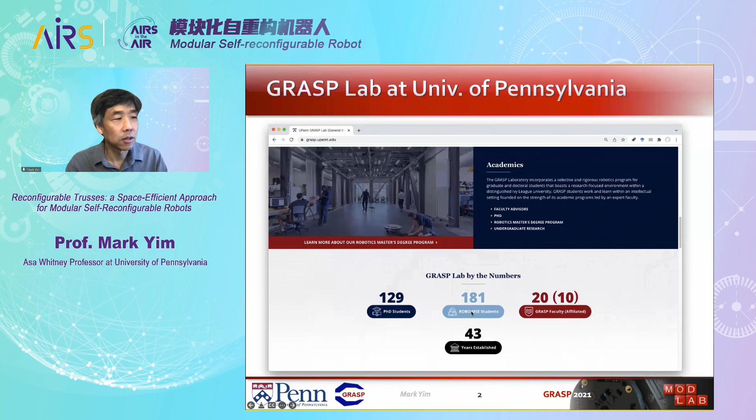Thank you, Dr. Lam. So yes, I'm going to talk about reconfigurable trusses, which are a space-efficient approach for modular self-reconfigurable robots. But first, I'd like to talk a little bit about the GRASP Lab. Since I'm the director of the GRASP Lab, I need to just give a little bit of the background of where I'm coming from. The GRASP Lab, as Dr. Lam mentioned, is the oldest. We have around 130 PhD students and 180 master's students, about 20 faculty in a large variety of areas, including perception and machine learning and control, planning and mechanisms. So that's me at the bottom. We've been around for 43 years, which is the oldest in the country. And I think that makes it the oldest in the world. I'm not positive, but that's currently where we are sitting.

So today, what I'd like to do is talk briefly about modular self-reconfigurable robots that I've been doing in my lab over the past quarter century or so. And then I'll talk about this variable topology truss, which is the newer system that we're starting to look at that's more space efficient. First about the hardware and then the software. So what is a modular reconfigurable robot? Essentially, it's modules that are very simple and repeated. You have lots of them. You can combine them together to form larger shapes. They can reconfigure themselves into different shapes to do different things. So historically, Toshio Fukuda did this thing called the cellular robot or CEBOT in 1989. That was his first publication.

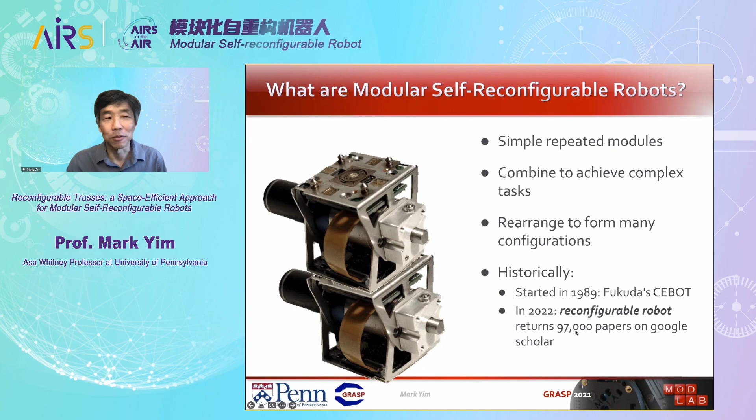Now, if you go to Google Scholar and you search for reconfigurable robot, there are 97,000 papers that show up. So there's a lot. Self-reconfigurable robots is still in the thousands. So there are a lot of papers since then. There's a lot of people that have been looking at that. What can you do with them? This is a video from 20 years ago. Just showing, for example, you can have a robot that rolls like a loop that's fairly efficient, or can move like a snake that's better at moving through terrain, or go through small cluttered environments and that type of thing. The robot theoretically could also reconfigure itself, maybe into a legged configuration. Legged robots tend to be better at stepping over uncertain terrain and that type of thing.

So over the years, there are a lot of different types of robots. There's even a book now on self-reconfigurable robots that is like a survey of the different robot types that have been created, modular self-reconfigurable robots. And in general, there are two main ones, I think.

There's one that we call the chain type, which is the one that you just saw the video of, in which the modules form serial chains that are like arms or legs. And then there's the lattice type, which are modules which are often cubes, but don't have to be cubes. They're usually space-filling geometric forms that attach together. And then there's the hybrids, which can do both lattice and chain type.

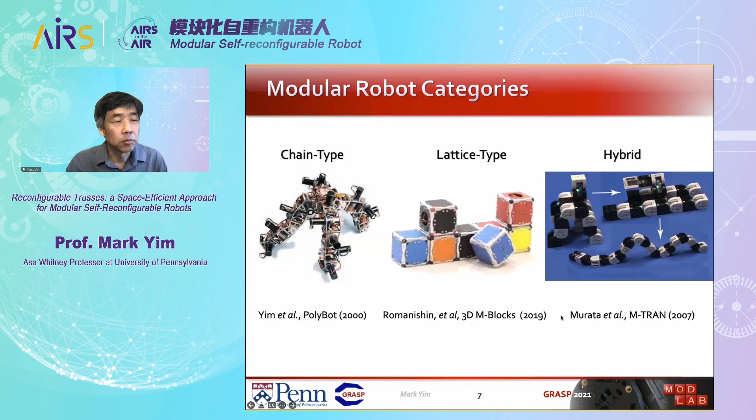So in the year 2000, I wrote a paper in the ICRA conference, in which I said there are three promises of modular self-reconfigurable robots. They can be versatile, because self-reconfigurable robots can change their shape to suit the tasks and changing environments. They can be robust, because if there are some modules that are damaged, they can reconfigure themselves, or they can throw away bad modules if you have redundancy, or they can self-repair theoretically.

And they can be low cost. If you have lots of repeated modules, you can use economies of scale to reduce the cost of individual modules. Of course, these were promises, and I didn't know if they were true. This was 20 years ago. Essentially, versatility has borne out. Yes, we can do lots and lots of different things. The robustness one, I'm not so sure. Maybe we've got some examples. People are starting to make some progress towards robustness.

The low cost one, I think, is pretty much not true. And certainly in some aspects, it's not true. And that's what I'm going to be talking about. And eventually it may become true, but I'm not sure. Okay, so let's talk about versatility.

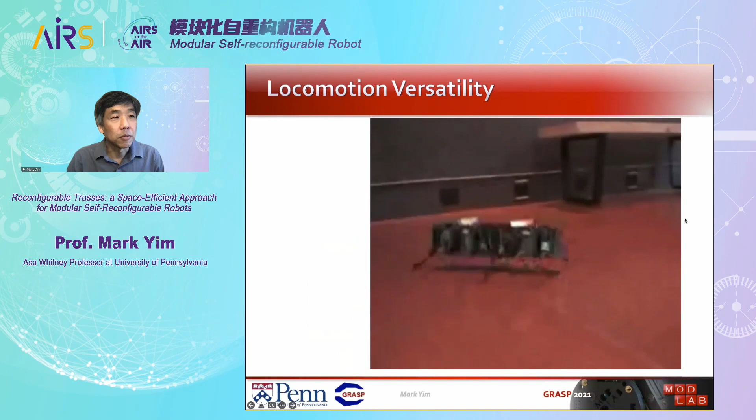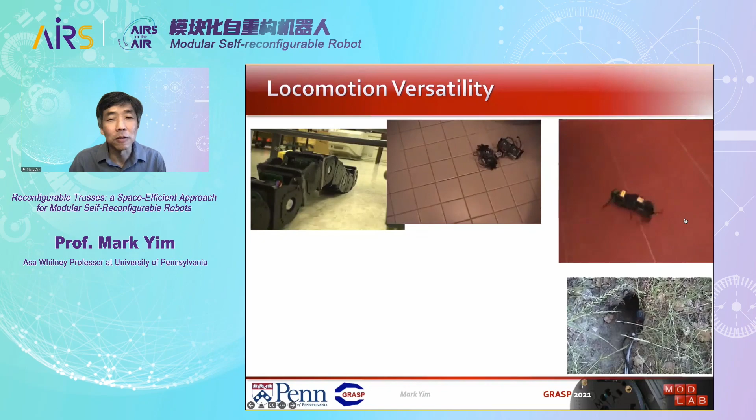In terms of versatility, there are lots of different styles of locomotion that modular robots can do, different types of walking or rolling or moving like a snake. This is actually a video of a snake we made and put inside a little gopher hole in the ground, with a camera in the head, and explored the different types of things you can see. We actually used the concertina snake-like gait, which is an open loop gait that conforms to the shape of the tunnel, and that worked pretty well.

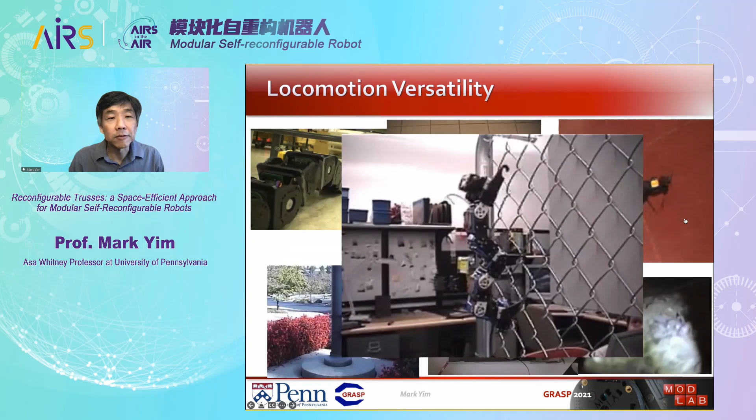These robots can also climb poles, climb fences, climb stairs. There's lots of different types of mobility, and they can even use human vehicles like a bicycle or a tricycle and that type of thing. This last video is actually of I think the largest number of modules we had in a single configuration, which is about 55, 56 modules in a 14-legged centipede-like gait. So there are lots of different types of things you can do.

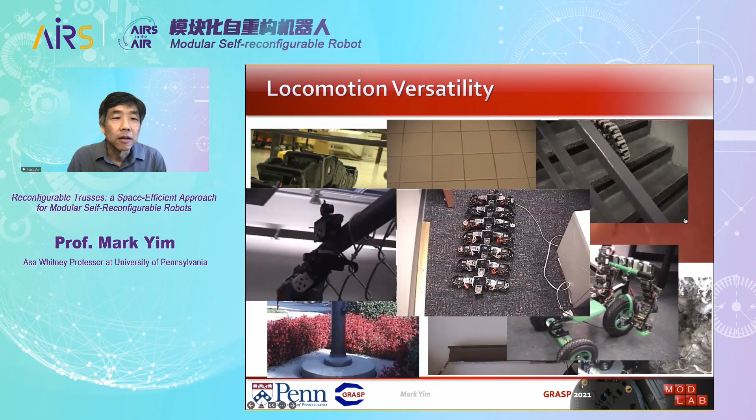I think we've shown there are maybe hundreds of different gaits that people have shown. People have also done manipulation, lots of different types of manipulation. Essentially, I think the versatility has been shown. Robustness is another issue. When you have lots of modules, you have lots more modules that can break, and so things are often failing.

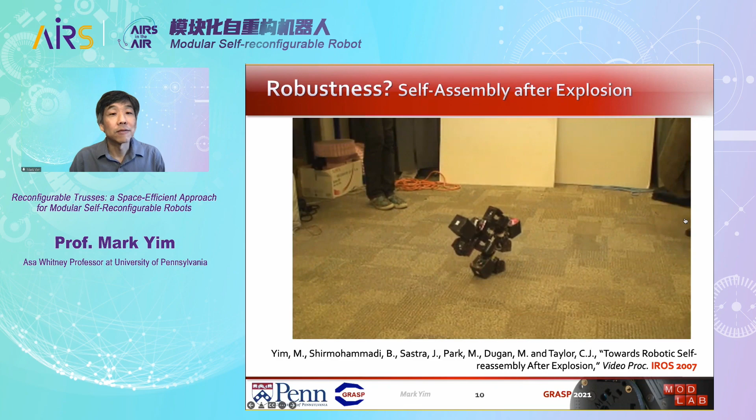But here's a simple example from 15 years ago of a kind of self-reassembly or self-repair. So the robot's walking by itself, and then some mean grad student comes up and kicks it into pieces. It can reassemble itself.

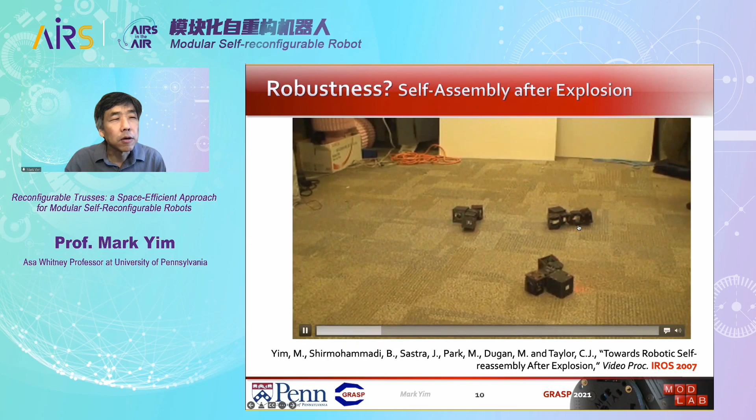So in this particular case, we've got groups of modules. I think there are 3 or 4 modules with a smart camera on board. The little blinking light is actually what the camera uses to communicate. Each little group can communicate with the others through the blinking light, and they can see that blinking light.

They also have an accelerometer, so they can tell whether they're upside down or upside up. They have a self-righting behavior. And the first thing it does is go through a search pattern to find the other pieces. It recognizes that it's fallen apart, and so it tries to reassemble itself. And they can move kind of like worms essentially around and try to reconnect. Each one of these groups has magnets on the side, so they can dock to each other with the magnets.

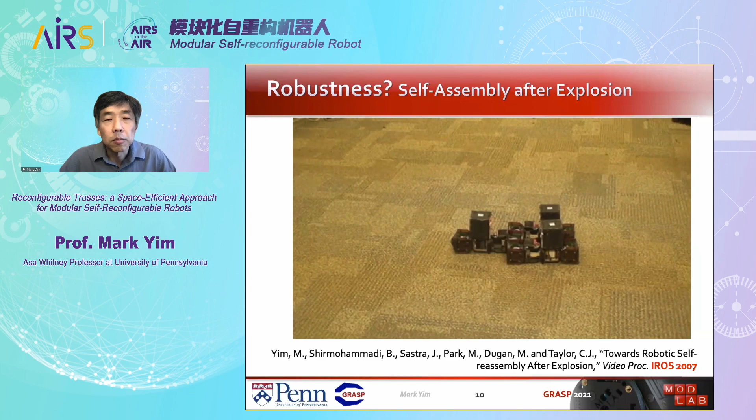I'm going to just speed up a little bit here, get toward the end. So the system can ultimately dock together, and then the idea is that if it ever falls apart, or if someone takes it apart, it can reassemble itself and then continue on the task that it was working on. In this particular case, the robot was walking, and in this video that we took, something kind of funny happened at the end as it was standing up again.

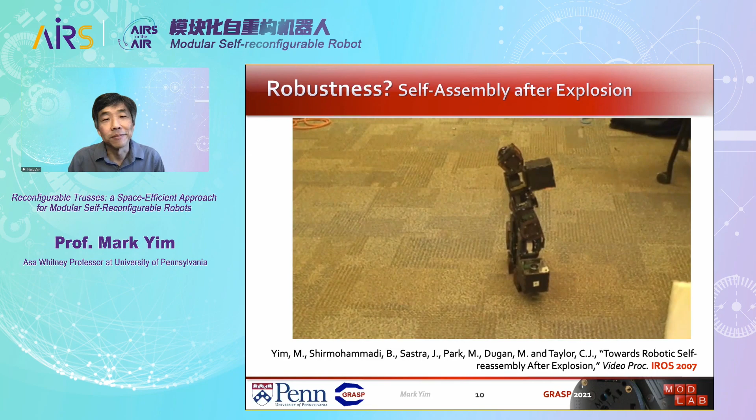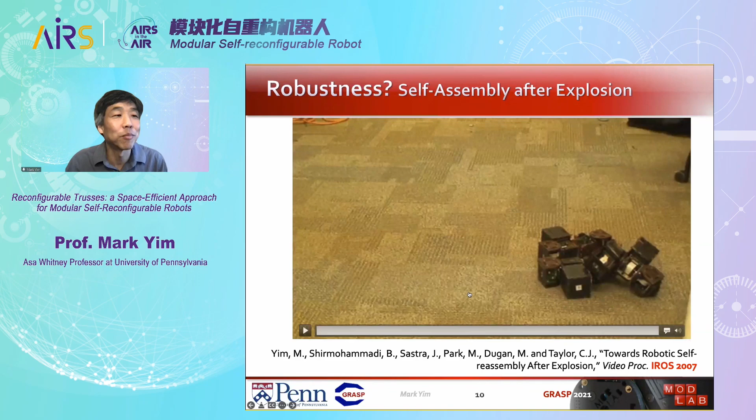I think one of the legs or one of the feet got caught in the carpet, and as it tried to take its first step, it fell down and fell apart, which was unfortunate. But it's also, I think, an example: people kept thinking, oh gosh, robots are going to take over the world because they can repair themselves and you can never destroy them, but we can barely make them walk. So I don't think it's really a concern. Okay, so that was 15 years ago.

Something that's a little bit more recent is a system that we call SMORES-EP. Whereas the previous system had individual modules that had 1 degree of freedom, these modules have 4 degrees of freedom. They have these connection plates. There are 4 of them, 3 round ones and 1 square one. The 3 round ones can rotate. Every face can be connected to every other face, so any module can connect to any other face. Each one of these faces can be connected at 90-degree rotations.

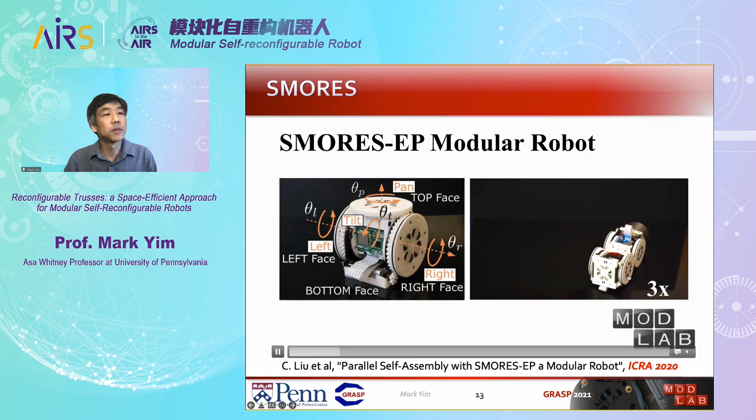So any 2 modules can attach in 17 different distinct kinematic ways at 90-degree intervals, depending on where that square one attaches. Maybe it's easiest to see in the video. Here you can see the 2 side round faces can actually be used as wheels, so they can drive around by themselves, be individual. They can detach or attach through that electropermanent magnet.

Modules by themselves can drive around, but they aren't necessarily so useful. They may come up to a crack and get stuck. Larger groups of modules can dock together and then increase their capability by doing things like being able to cross over gaps or other things. So this particular demo was actually done manually. There's a person who's driving each module, but we would like to have these things be autonomous.

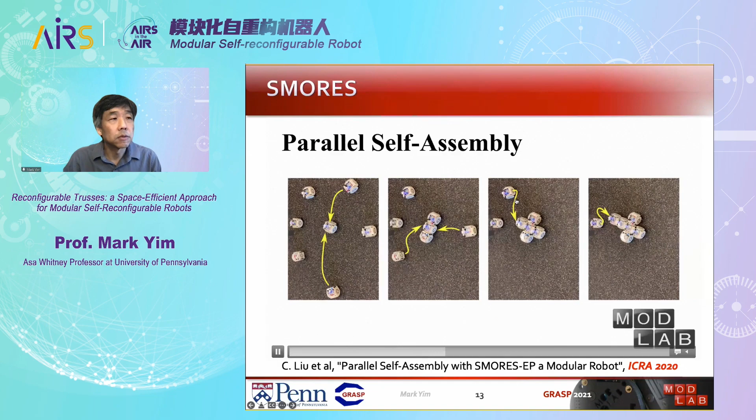So one of the things in this particular publication from just a couple years ago was looking at how do we assign which module maps to a different module in a configuration, and then how can we get them to assemble themselves. In previous work, 1 module at a time could dock. This one is multiple modules assembling at the same time. And so this is just an example of self-assembly for an arbitrary configuration. In this case it's what we call a mobile manipulator.

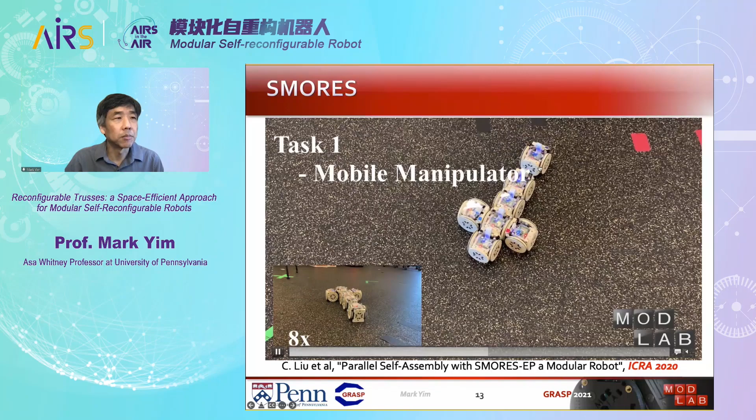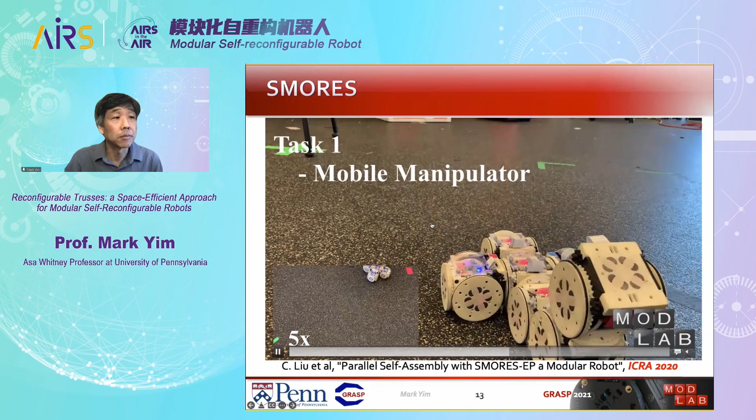It has a longer series of modules that can act like an arm. The docking is done in a Vicon motion capture system. So the modules know where they are through the motion capture system, and they use that to dock. They all do have motion planning, all standard things, and you can do a variety of different shapes. So that's a more recent version of modular reconfigurable robot that we have.

So the third promise was cost. Just looking at cost, the very early modules that I showed, the ones from like 20 years ago, were about $100 per module, about 5 centimeters on the side. We had a later version that was about $3,000, just to give you an idea of the range of costs. The SMORES-EP that I just showed you, the more recent ones, are also about $100.

Of course, there's actually a huge amount of labor. For the magnets, we had graduate students actually wrap the wires and machine out the pole pieces for hundreds of magnets that are in each module. There's lots and lots of parts. So there's a ton of labor. So $100 actually is not exactly right if you include the labor involved. But in any case, it's on the order of hundreds. It would be useful to look at the scaling idea though.

Kilobots, which Michael Rubenstein and a bunch of others built, was about $14 in parts for 1,000. It was very limited in what it can do, though. They kind of vibrated and moved around that way, and they were about 3 centimeters in diameter.

Also, if you look at millions of elements, Ed Steager, Vijay Kumar, and others looked at using bacteria. So you've got millions of bacteria swimming around. Can you get them to push microscopic objects around and do that type of interesting thing in terms of swarm robots? And for about $16, you can get a vial of bacteria that's about 5 milliliters.

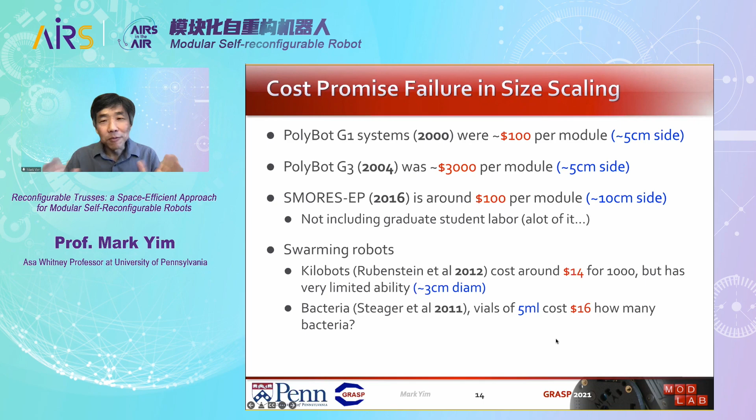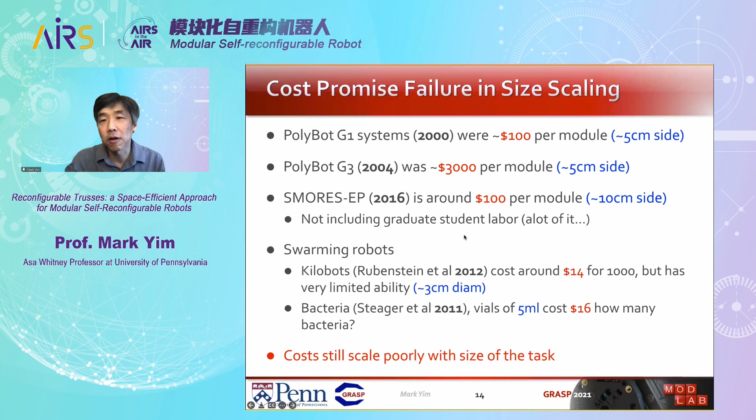So the number of modules is actually not that appropriate, depending on the size of the task that you want to have done. So if you've got a task in which you need, like, a human-sized thing, you need something about that big. And it doesn't scale that well with the numbers. Like if you were to do it with bacteria, you're going to need trillions. I mean, still $16 is millions of them, but they're super tiny. So it doesn't really make sense. The costs, when you think about size for modular robots, just don't necessarily scale so well, at least with all the modules that we have so far.

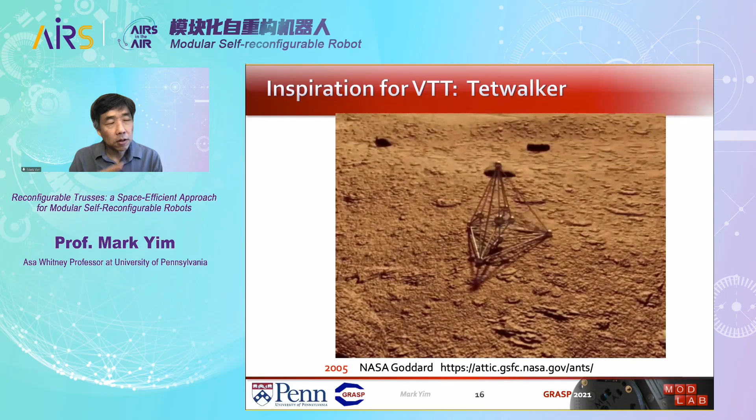So that brings us to the variable topology truss. This is a system that does scale well with size, and that's because it can change its size. And so I'd like to talk a bit about that. So the inspiration for this variable topology truss started with this thing that came from NASA Goddard in 2005, 17 years ago.

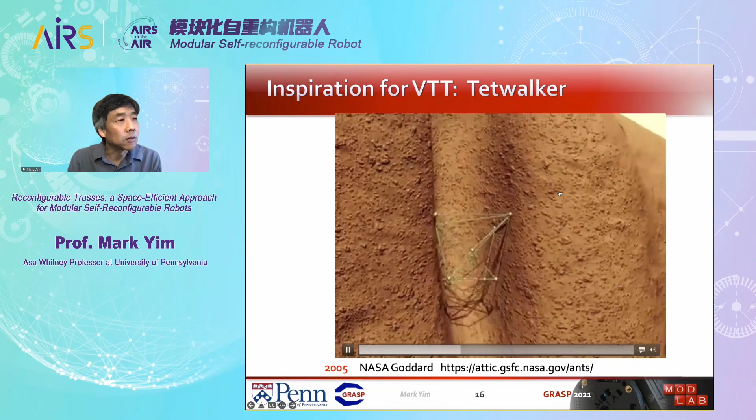Essentially, it's a truss in which the members can change length, each one of these rods. And of course, this is a simulation of what it might look like, this robot exploring Mars or something. It can do things like chimneying up cracks. Also, in the very beginning, you saw it started out very small and then expanded to a much larger size. It can roll around in this fashion, kind of changing its center of mass, maybe cross over gaps and that type of thing.

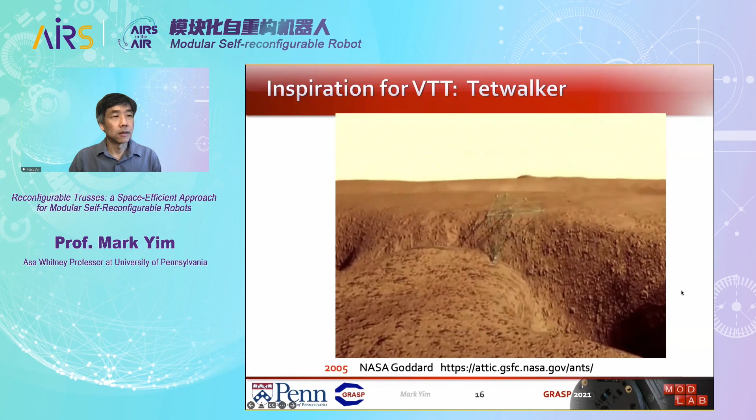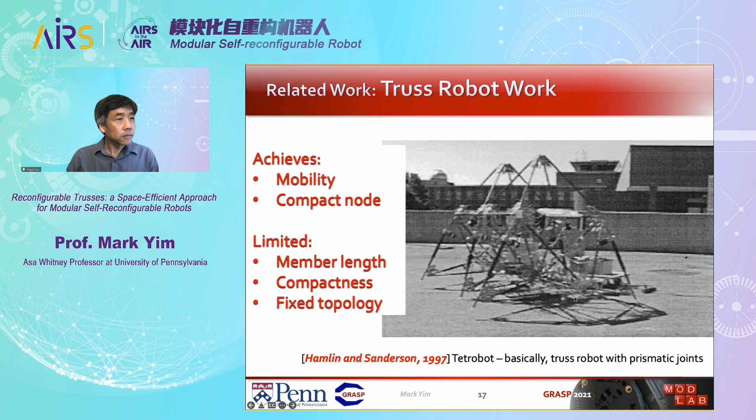The extension to compression ratio was not more than maybe 2, whereas the simulated video you saw there was probably 100. And then they had these node mechanisms, which are actually very important and very interesting. And we actually borrow some of those ideas in our work as well. And I'll go into a little bit more detail on that.

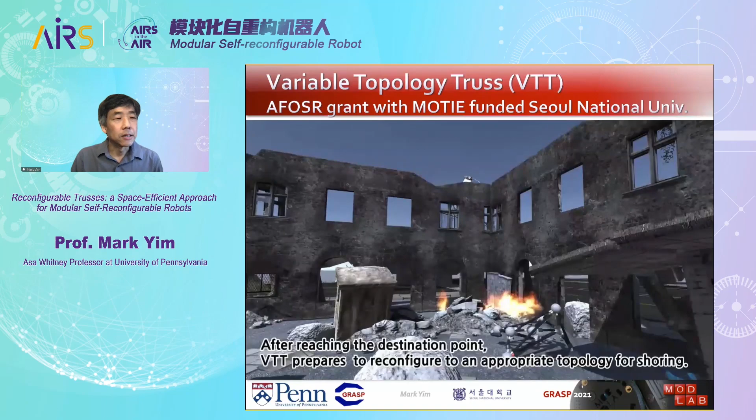So this is what we envision the variable topology truss to look like. The robot can roll around just like the other one. And the application we're looking at was search and rescue. In particular, in a damaged area, one of the things that the rescuers need to do is shore up a building to make sure that the building doesn't fall on them as they look for victims. So that was our ultimate goal.

The one difference between all the previous work and this one is that the truss topology can change. This isn't actually the way that we ultimately got our topology to change, but an example of how, if you have a different topology, you can form different shapes, which very often is critical to making the shape. Like if you wanted to have a large tower that could do things like lift up a building, you'd have to change the topology from the one that was there before.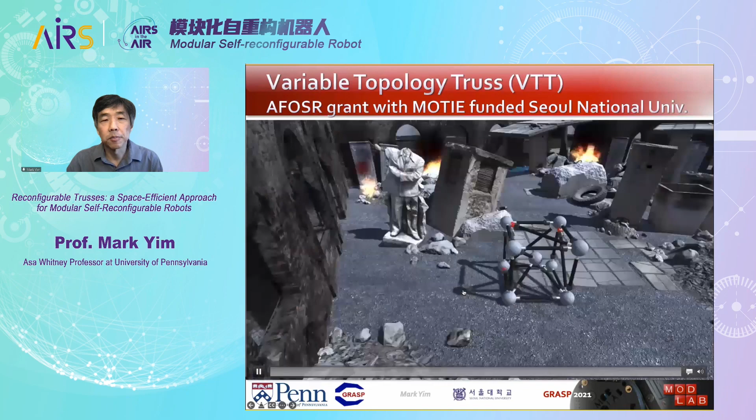Okay, so what do you need to have a system that can shore a building? Holding up a building that's damaged is called shoring the building. It needs to be very, very strong to support thousands of pounds and have a very large reach. And so that's where trusses come in. Trusses are naturally used everywhere in any type of building that you see. And that's because they're strong and very efficient materially, and therefore in cost, to make a larger structure that's also strong. So trusses are the natural thing to use in terms of an engineering technology.

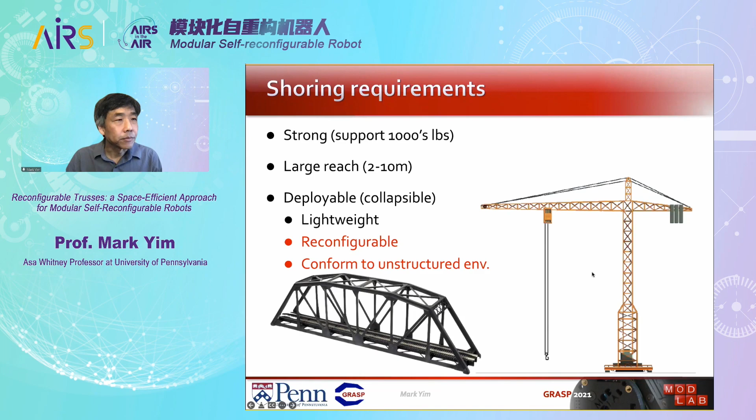So this is one of the latest versions of our VTT, or variable topology truss. So you can see the members can change their length, and also the joints between them are using the same type of structure that the Hamlin and Sanderson Tetrobot uses.

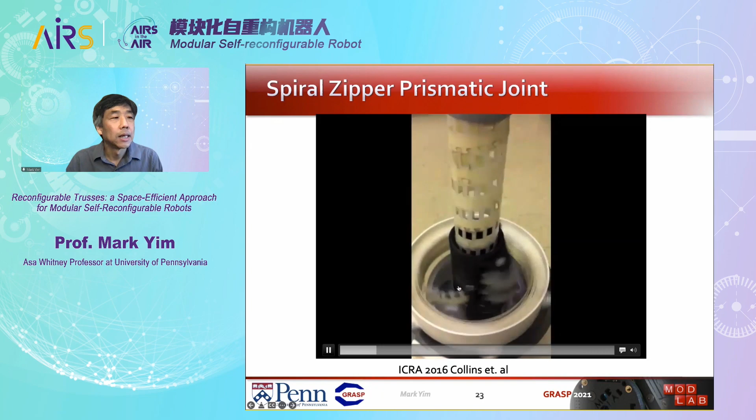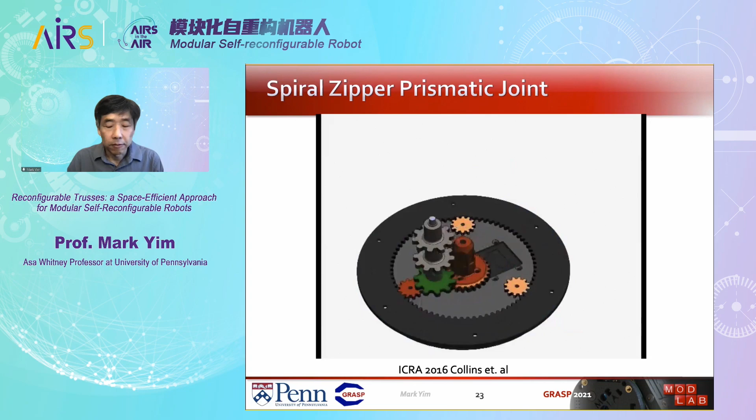So the members that change their length are basically based on what we call the spiral zipper, which is a prismatic joint. And essentially it's a band, in this case, we're just using a plastic band that can form a tube. And it's like a zipper in the sense that there's what's called the slider on the zipper, the bottom part that joins together the top part of a band with the bottom part of the band. It has a certain teeth pattern. And therefore you can essentially zipper together a band into a tube.

The nice thing about the tube is that it's very strong. It's naturally light and strong, and I believe it's the optimal shape for making strength to weight ratio in terms of under compression.

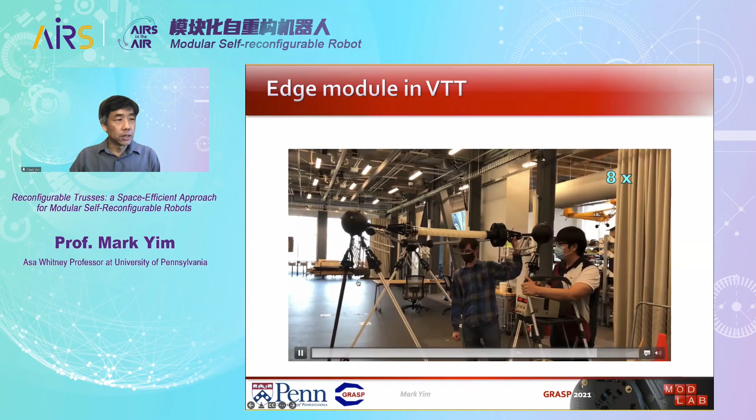In our VTT, we have what we call an edge module. So the edge module is composed of the spiral zipper in the middle, and then the two ends are what we call the node ends. And this is a simple example test that we have in a VTT structure as we are examining, just to make sure that the extension and compression is working properly.

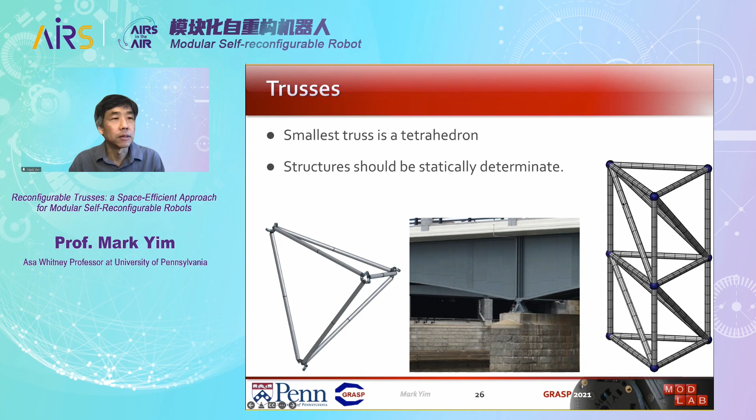So in trusses, the smallest truss you can have is a tetrahedron, which is the 6 members with 4 nodes. A characteristic of a truss normally is that you want the truss to be statically determinate, not over constrained or under constrained. If it's under constrained, you're going to have parts that flop around, and so it's not controllable. Over constrained means that you might have moments that can cause stresses if you have errors in length.

So often, if you look at bridges, they won't have all of the points that the bridges are attached planted in the ground. They'll actually have rollers on some parts. And that's because very often in bridges, you want them to be statically determined. You don't want them to be over-determined if they stretch due to temperature and that type of thing.

So in our case, we're going to use the nodes as spherical joints. What we want is for the nodes to locate the position, but not constrain the angle of the truss members. In the truss members, we want to have very high expansion to compression ratio, so the spiral zipper gives us that. The other thing that we want with our nodes is to allow the systems to have their topology change, and for that we need the nodes to have arbitrary degrees, an arbitrary number of members that are attached at that point, which makes the design actually quite difficult.

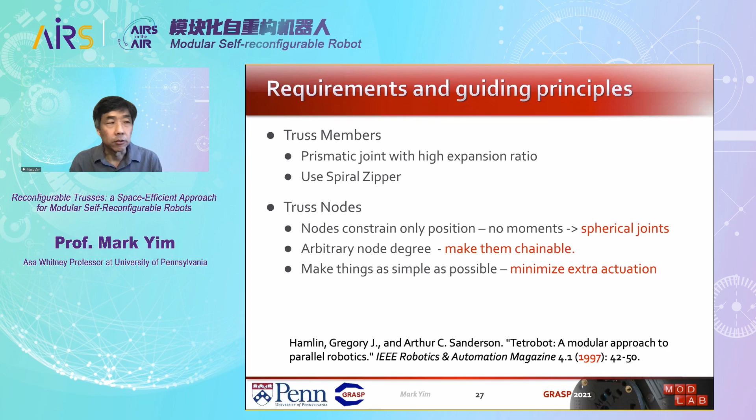One way to do that is to make them chainable. So chainable means that you can attach more members onto the end of a chain. And that way you can grow or merge or have larger nodes of arbitrary degree. Also, we want to make things as simple as possible, which is always a design goal.

The expansion to compression ratio was very, very large, maybe larger than is feasible, as far as I can imagine. And then the other thing is motion planning. They had, I think, 18 members, so that's 18 degrees of freedom, which is kind of difficult.

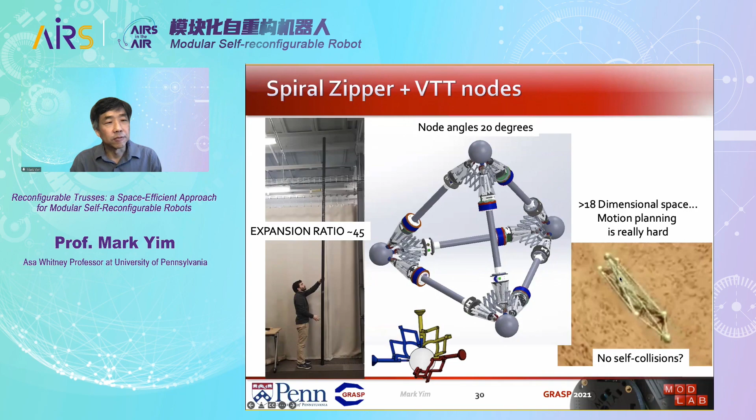So the way we do reconfiguration is what we call merging and splitting. Essentially, if you have nodes that have 6 members or more, they can split apart and then rejoin.

And so splitting and merging is this part. Again, using that chainable method is what we're talking about. So anytime you need to have at least 3 members to be controllable. And then, if you have 6 or more, you can split in different ways.

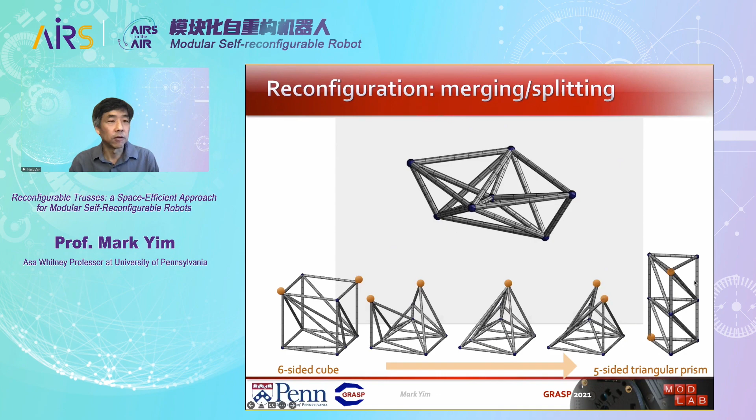So if you had a cube that you wanted to make into that tower, like in that original video, you might start with these 2 nodes and have them merge together. So they might bend down first here, and then join, and then split, where it splits apart in a different way than it was in this case. And so then you can configure into this larger configuration there.

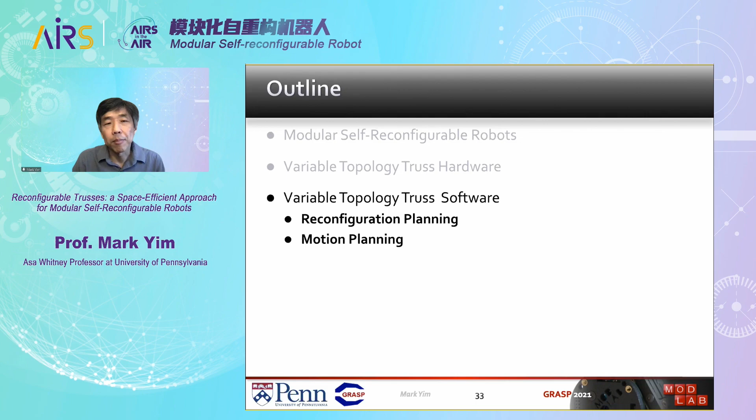I'd like to now talk a little bit about the configuration analysis and reconfiguration. So the software basically breaks up into 2 parts. Because we can change the configuration of the topology, the reconfiguration planning is one thing that we need to think about. We haven't really solved that part yet, so I can tell you a little bit more about where we are on that. And then there's the motion planning. We have 18 degrees of freedom or more. How can we do motion planning for that? And a lot depends on the geometry.

So the nice thing about a truss is that it can be represented as a graph. It's very convenient. There are many, many algorithms for doing stuff with graphs and manipulating graphs. Essentially, every truss member can be an edge in the graph, and every node can be a vertex. The problem is that we have a physical system, and graphs in general don't always keep all the constraints that you have with a normal physical system.

Graphs don't necessarily preserve the number of members or the number of edges. The number of edges can change as you do manipulations on the graph. In our case, the number of members must be the same. The number of nodes can change because we can merge nodes or split nodes, but the members are physical tubes that can't disappear or be created out of thin air. The other thing is that the nodes have to be degree 3 or larger in order to maintain controllability.

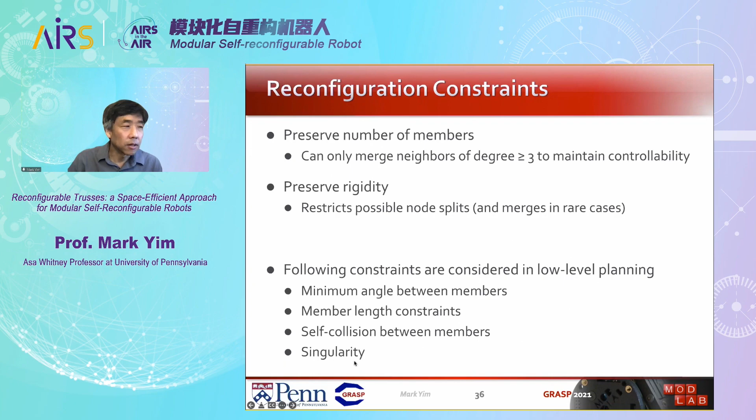And then there's this thing about rigidity. Doing analysis for being statically stable and maintaining rigidity is another concern. Then there are the other physical constraints, the minimum angle I mentioned before. Members can't be infinitely long. And then there's looking at singularities in the configuration for motion as well as self-collision. Self-collision is actually one of the biggest ones, which we'll talk about in a minute.

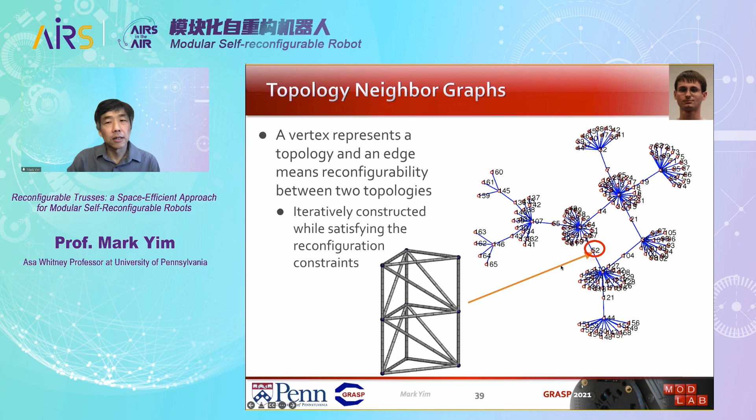So one of the things that we start to look at when you look at the topology is the topology neighbor graph. So this is the work of Alexander Spinos. Each one of these little red circles represents a particular topology. And every time you merge or split, you move to a neighboring one; that edge represents either a split or a merge action. And by doing that, all of these configurations are thus connected by a sequence of merges and splits. And this is how you can get from one configuration into another configuration.

So the path planning at the topology level is doing this. What is the sequence of merges and splits that you'll need to get from one arbitrary configuration to another arbitrary configuration? And ideally, you'd want to do that in the shortest number of steps. So for topology level path planning, the hardest part is just initially enumerating and finding out, are they in the same connected component? When you have 18 members, the number of configurations isn't that large. But once you get to 21, 24, 27, it grows exponentially into many millions or billions.

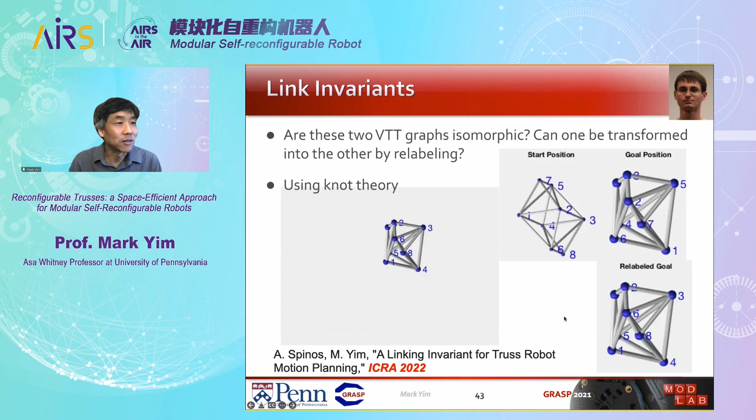Okay, the second half of the software part is looking at motion planning. So as I mentioned, we need at least 18 members, at least 18 degrees of freedom, so it's at least an 18-dimensional space. The biggest problem is that these tubes are fairly close together, and so in the configuration space, self-collision is the thing that we're most worried about. And it happens a lot because they're all kind of intertwined with each other.

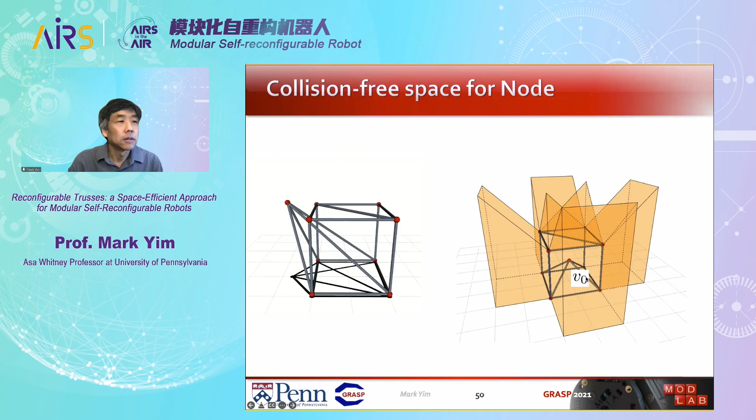These polyhedra actually extend to infinity if the tubes can extend to infinity. The limit of this size is just the joint limits of the tubes, and that's why they're kind of closed up in this size. But this is the free space. The question is, how do we generate this collision-free space for this one particular node? It turns out that you can relatively easily generate it for essentially every node.

You need to think about the motions of nodes, not the changing of members. So if you think about this node moving and its possible intersections with this bar, the polygon that the triangle forms is a half space. On this half of the polygon, this bar that's connected to it would collide, and it would be free on the other half space. For the other bars, it would be vice versa. So these polygons form the boundaries of the space.

So if you basically take all possible polygons that are generated from this type of interaction, and you take the intersection of where all of these polygons are connected together, where they form polyhedra, then you can actually determine which ones form the free space for the node that you're looking at. And this can be done in polynomial time. Essentially, it's on the order of the number of members to the fourth power. So it's polynomial.

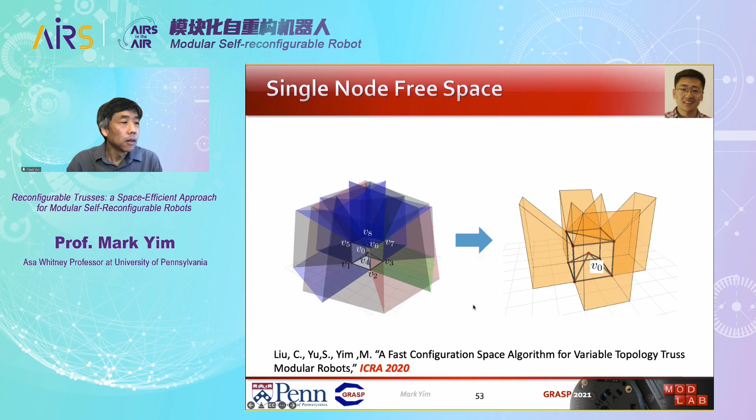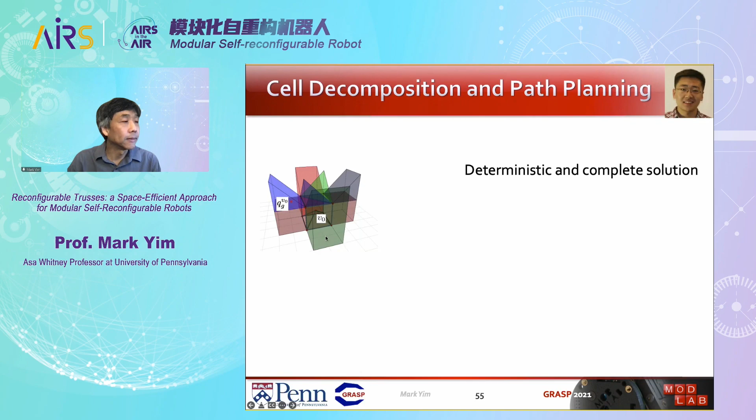Once you do that, motion planning for an individual node is relatively straightforward. This is a non-convex polyhedron, so we can turn it into a sequence of convex polyhedra, and then, let's say we want to move from this position to this position, you're just moving through the convex polyhedra sequentially. So it's basically a standard cell decomposition motion planning technique. It's deterministic, it's complete, and it's fast, so it works pretty well.

But the one thing is that it's only for one module moving at a time. So it's very different from the first example that I showed, where they're all moving at the same time using the randomized path planning technique. If we started with this cube and again wanted to form this tower, this shows an animation of how it could be done. This one was solved in 4 seconds, much, much faster than the randomized path planning technique, but it's only moving one at a time.

Essentially what we do is look at each one of the nodes that needs to be moved, and then search through the possible orders, finding the sequence of which ones need to move when in order to get to the final configuration. The one issue with this is that if multiple nodes must be moved at the same time, it's possible that we won't find a solution even when one does exist.

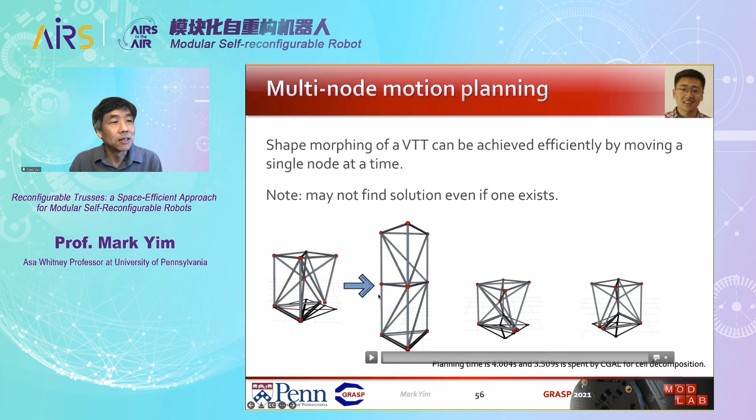But the other method would work, it's just much slower. So obviously you could do this quickly first, and if you actually need something complete, well, the randomized path planning method isn't complete either. But in any case, they end up with different solutions. Ours is just very fast.

So here's another kind of fun planning aspect. This isn't actually reconfiguration planning or motion planning, but it's more locomotion planning.

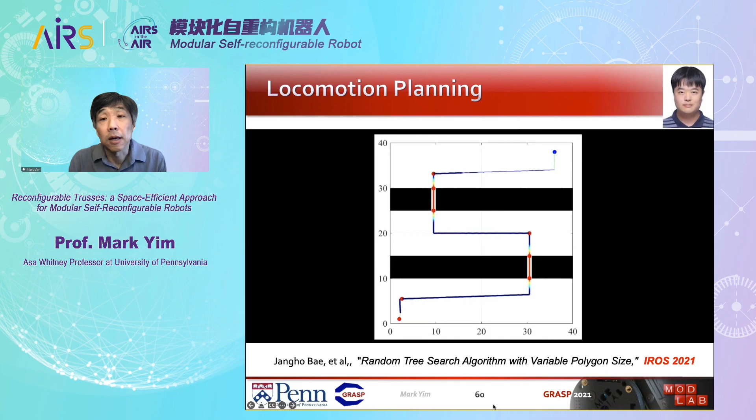So since we have a robot that can essentially change its size, if we had an environment in which there were small obstacles we needed to go through, small gaps, the robot could change its size in order to go through them. So this is the locomotion planning for the VTT in an octahedron shape using the rolling or tumbling type of gaits. It uses the random tree methods to find the path.

There are a couple differences here. One is that it's applied specifically to center of mass rolling. This little pink part is the center of mass as it rolls to the different faces. But the fun thing is that when it comes up to the small gap, it can just change its size, and theoretically, depending on how small it can get, it can get through a gap as small as it can get itself.

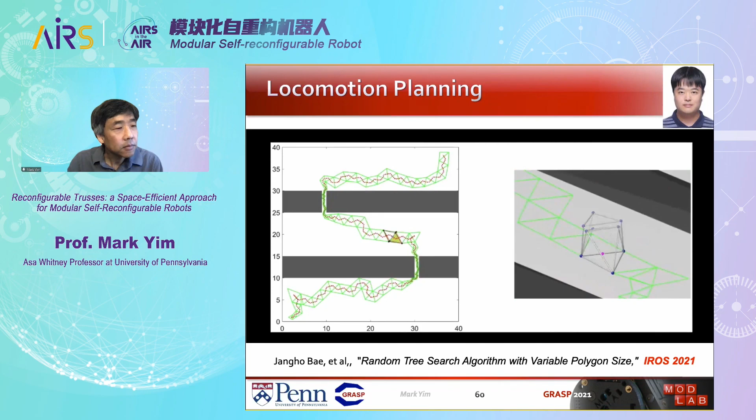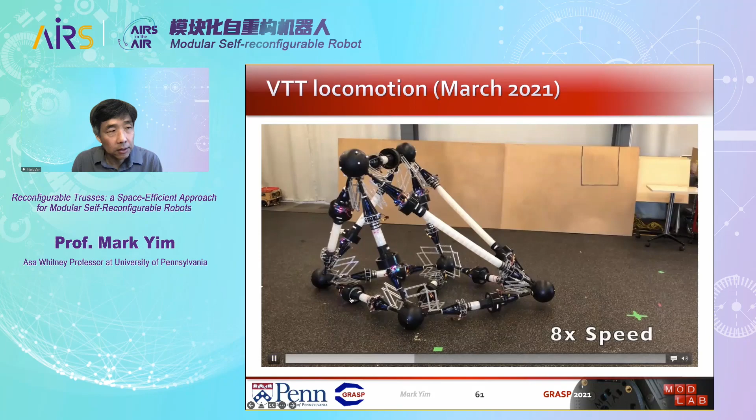I actually want to mention one thing as I'm nearing the end here. As we are doing the development of these systems, one of the things we are realizing is that many times you need lots and lots of modules, and you're doing lots of things at the same time. You're developing new modules, redesigning them, doing experiments with them, with the software, as well as doing demonstrations. So you essentially want as many modules as you can have because you want to push the types of software control problems that you have.

Usually they're looking at what you can do with large numbers of modules, but at the same time, those things are breaking because you're developing them and experimenting with them. So you need extras. And one of the things we realize is that we often use the older designs even as we make new ones. And so it's critical that you have the same standard interface as the older designs because you're constantly pushing the number of modules that you have.

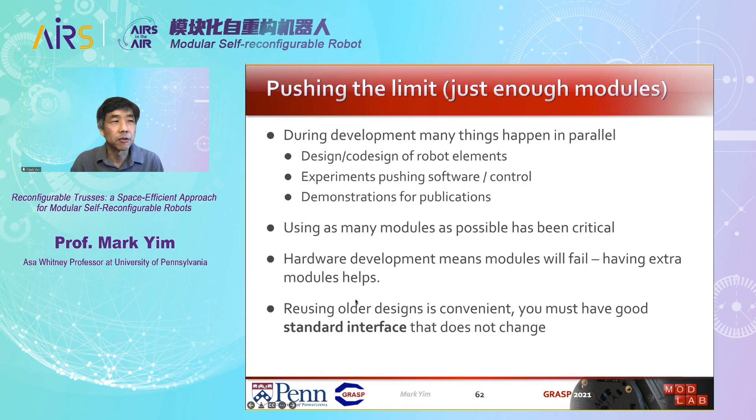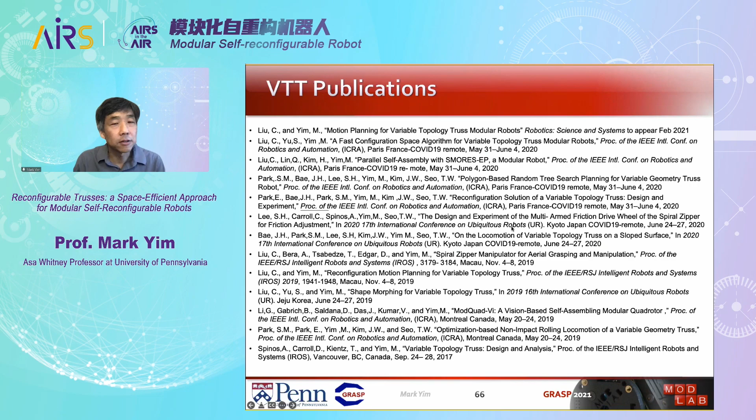Okay, thank you very much, Professor Yim, for the excellent talk. One thing that amazed me a lot is the expansion ratio of the truss member. I think the mechanical design is very genius. It can be very compact at the beginning, and it can make a very long rod with this structure. So, all right, are there any questions so far to ask Professor Mark Yim? It is a very valuable opportunity to interact with our guest speaker.

Okay, I already saw some questions in the chat room. One of the questions, yes. So do you want me to read it? It's quite long. Yeah, it's quite long, but let me see. Maybe I can read it.

Dear Professor Yim, thank you very much for sharing. Could you share your thoughts on configuration selection? Modular self-reconfigurable robots can choose an appropriate configuration according to the environment and task. But how do we evaluate whether this configuration is appropriate for the current environment and task? How do we choose the best configuration from an exponentially growing configuration space? Do deep learning and reinforcement learning hold any promise to solve this problem? Your guidance is greatly appreciated.

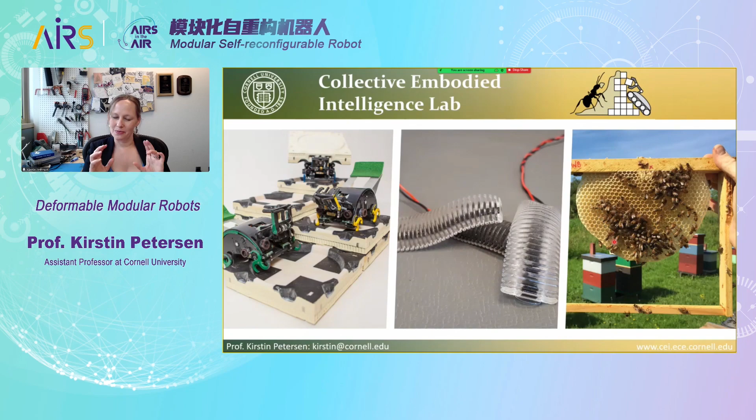So I run the Collective Embodied Intelligence Lab at Cornell University, and what we do is really try to design and build and operate robot collectives that are inspired by swarms in nature. And so we look at a variety of mechanisms and materials, from rigid robots, let me see if I can find my laser pointer here, to soft robots and even natural swarms, because they all represent very different trade-offs when it comes to embodied intelligence. But today, the topic is not going to be on general swarms. It's going to be on these modular robots, and specifically deformable modular robots.

And so, as Professor Yim has already said, modular robots are basically composed of these active modules that can rearrange their connection topology often, and then try to adapt to dynamic environments or changing task settings or partial failures. And so my plan for today is to start by discussing what system intelligence means. It's going to start at a very high level.

So what does system intelligence mean in these types of systems, where it's really spread across many agents that all physically interact, and they can occupy and potentially even operate on the same environment. And then we'll talk about the advantages of this design space between soft robots and robot collectives. And then we'll discuss the overall design philosophy that we tend to take in my lab.

And then finally, I'll show you these 3 different systems down here that highlight some of those ideas that I'm going to present and represent different ways in which agents can really coordinate with each other. So I'm going to keep it fairly high level, but if you have any questions about particular details, please do ask.

Okay, so let's start with system intelligence. So I'm just going to start by listing different ways in which you can inject intelligence into robot collectives, because they're not all intuitive. And please be lenient with my choice of words here. As I said, this is a very interdisciplinary talk, so the terms differ by the particular disciplines, and I'm just going to keep some that are fairly general in style.

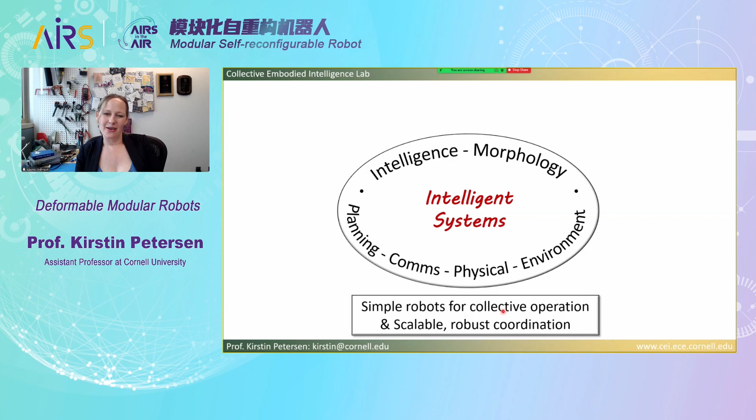And part of that work really means trying to develop very simple robots that can realistically be used in large collectives. And part of it is figuring out new ways of generating both scalable and robust coordination among those robots. And that's often done through studies of social insects. But today, we're just going to stick to one type of robot, these deformable modular robots. And they're really inspired by systems in nature. So let me give you a couple of examples, and there are many, but here's just 2 examples.

So this first blob here is Physarum. It's a single cell slime mold. So this is a single cell. This entire blob can grow up to like 30 centimeters in diameter. Lots of nuclei inside of it, but there are no neurons at all. It's all morphological intelligence, if you will. It moves and it grows through these periodic contractile motions that push fluids and nutrients back and forth inside of its membrane. You might have seen them. They've been pretty popular in the media lately for their ability to connect pathways between multiple food sources hidden in mazes.

And the cool thing is that I think organisms like this sort of hinted ways in which we can use advances in soft robots to produce these sort of individual mobile robots. It's a weird type of mobility, but it is mobility, with behavior-based intelligence that's distributed throughout the morphology of the robot. And if we have robots like this, then we could have many of them working in close vicinity. And of course, there are collective versions as well.

So here on the right, I'm showing you Dictyostelium discoideum, which is a social slime mold. So this is just an individual cell. But it's moving around, it's feeding on agar, it's quite versatile. But when there's dearth, hundreds of thousands of these can come together to form much bigger snake-like creatures that move through these coupled oscillations and coordinated cell contractions.

And if you starve them long enough, they'll even morph into this fruiting body with a stalk made of dead cells and spores that fly off and repopulate new areas. There's incredibly sophisticated behaviors from these incredibly simple single-celled creatures. And I'm really excited about this idea of robotic systems that could become as robust and versatile as these slime molds, right? Where we start with super simple individuals, but we have enough of them, and there's enough compliance in how they interact such that eventually they can generate this kind of emergent overall complexity.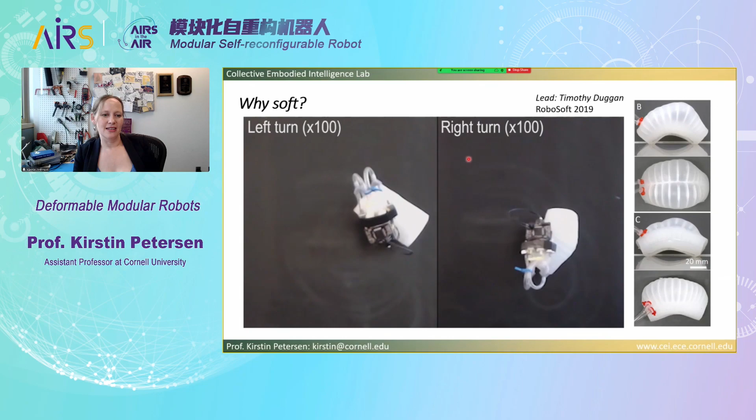And this robot's pretty cheap and modular. You can add more chambers for added payload, right? It's a nice robot. But if we think of it just as a soft robot, then there are two components to it. There's a rigid core. Most of it's soft, but there's a rigid core. And the rigid core is really what dominates the robot cost, the fabrication time, the weight, the fragility of the robot. It's the thing that breaks.

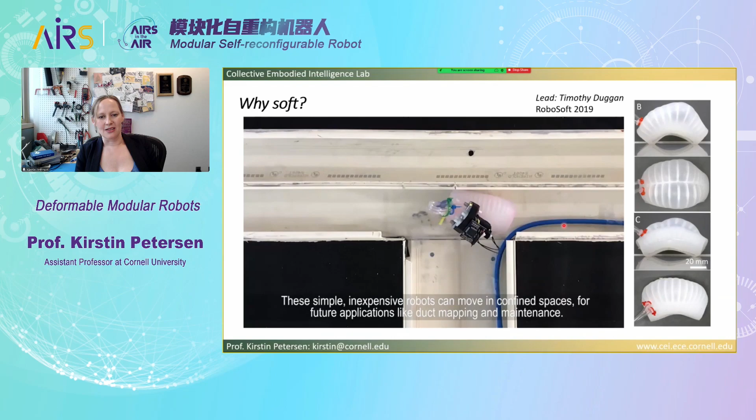Whereas the soft part of the robot is fast and cheap to make. It's robust to perturbations. It's multifunctional. So here it's both the chassis or the structure of the robot and the actuator that makes it move. But in many cases, in more sophisticated soft robots, you'll see that the soft robot itself also has sensors and sometimes even control elements. So you get a lot of multifunctionality in these kinds of robotics.

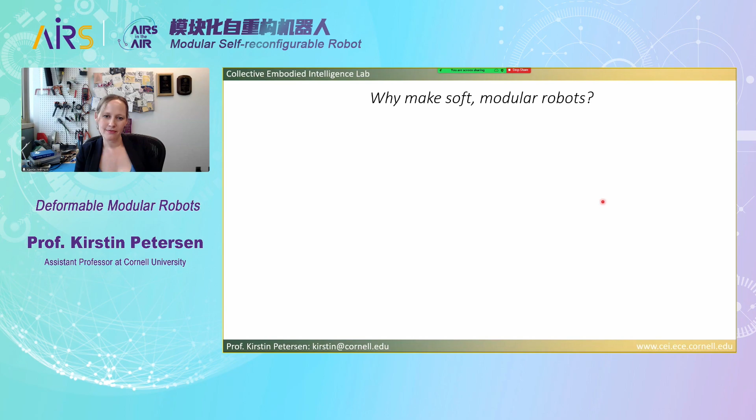So then why make these soft modular robots? Well, as we've just seen, soft robots tend to be scalable and affordable with multifunctional hardware that combines actuators and sensors, and can be robust to physical interactions between robots, which is handy in modular robots because they're operating in very close vicinity. Because it's an emergent field, though, these soft robots tend to be somewhat limited in what they can do. So it's typically just a few active degrees of freedom and fairly coarse, noisy sensing.

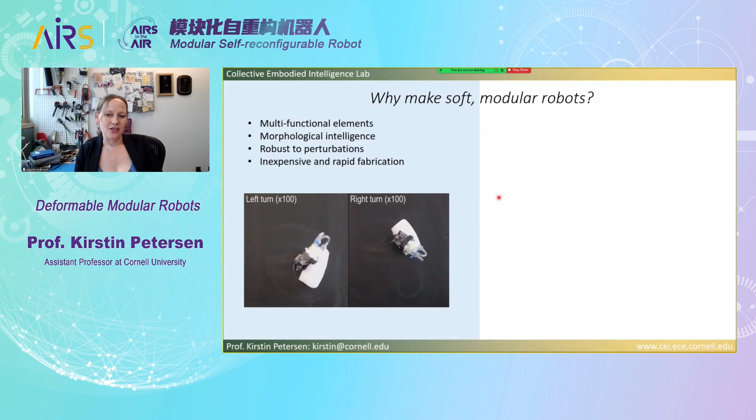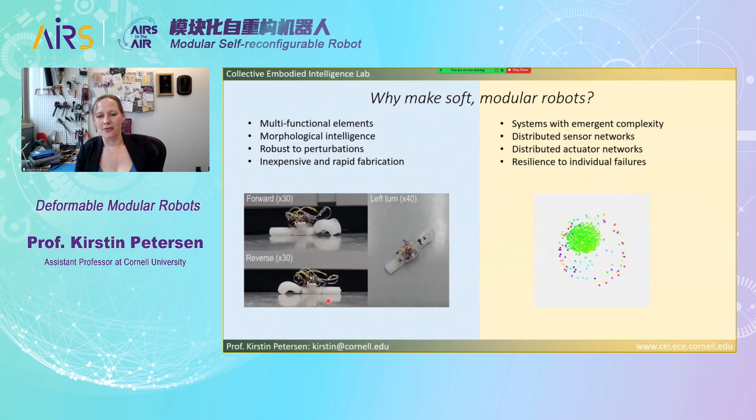And that's where swarms of soft robots come in. So we've just seen that in robot swarms or collectives, many simple agents can coordinate locally to achieve complex emergent behaviors. They can pool resources and filter out noise to achieve capabilities beyond the sum of the parts. And we can achieve resilience to individual failures. And so I think there's a lot of powerful systems waiting to be explored right here in this space in between these two fields. And I'll give some examples in this talk.

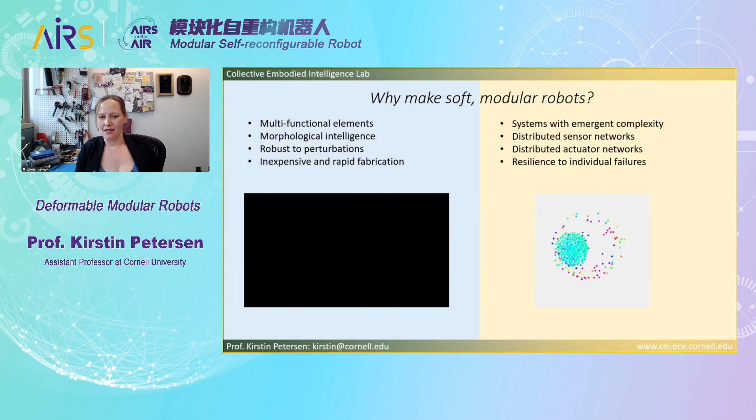But realistically, having systems with many robots practically means that we have to place great emphasis on robustness. In fact, it means that robustness, I think, has to be one of the key elements of our entire design process. It really motivates this careful co-design of all system parameters that Professor Yim was also talking about. So next, let me skip to our design philosophy and our design approach that we typically take. And then eventually I'll give you some more concrete examples with real robots.

So in our design approach, we actually put system-wide error tolerance over the ability to comply with a particular task. And of course, we design our robots for doing some task, but for them to realistically even get to that point, they have to first work really, really well. Just like survival is at the core of all natural swarms. So first of all, they need to be able to survive, and if they can survive, then they can do their task. So our design philosophy, again, is this careful co-design of fabrication and mechanisms and software, both in operation and control.

And I think we can all agree by now that minimalism is absolutely key. It means faster and cheaper fabrication. It means fewer things that break. And that typically, as we've talked about, necessitates very careful hardware-software co-design and these multifunctional components, because then we can get away with less. It also means thinking about designs that don't necessarily require these tight manufacturing tolerances, because then we can just create more of them faster.

To support really large numbers of robots, in terms of operation, we push for mechanical compliance so that they can interact in close vicinity without being damaged, and so that they can link up in these large lattice structures without concern for precise alignment. And we of course need to ensure really low maintenance. So you can imagine if you had a 1,000 module robot and every module needs 30 seconds of service every day, that's already a full-time technician just working around the clock on these robots.

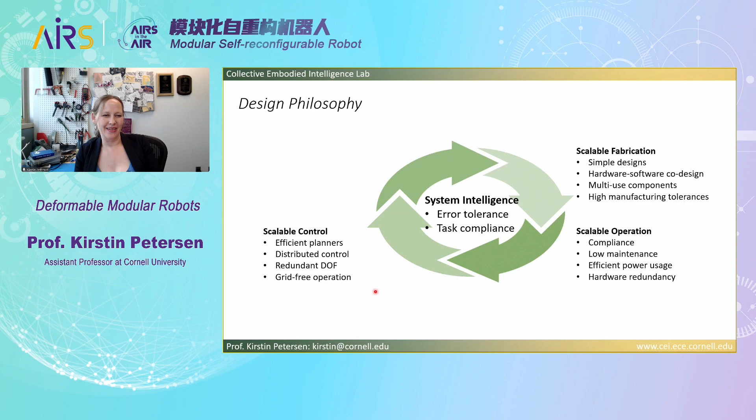And then finally, and this is probably the most contradictory or the thing that people don't so much like to think about, but I think it's really important that we make all our technology accessible to other researchers, right? Especially because this is such an interdisciplinary space that we actually need lots of minds to work together. And so it's really kind of key to these kinds of complex and heavily interdisciplinary systems. So that means both creating fairly realistic simulation environments, so it's really easy for people to adopt and think about control, but it also pertains to the types of mechanisms we design and the equipment that it takes to produce them.

So I think the key takeaway from this slide, I realize it's a heavy slide, is that a dedicated focus on system level robustness over all parts of the complete design cycle really supports truly scalable systems. And in turn, the ability for those systems to then comply with particular tasks, independent of the environment and whatever dynamic task setting we're exposing them to.

Okay, so, is there a question? Maybe you can use the mic. Okay. Anyways.

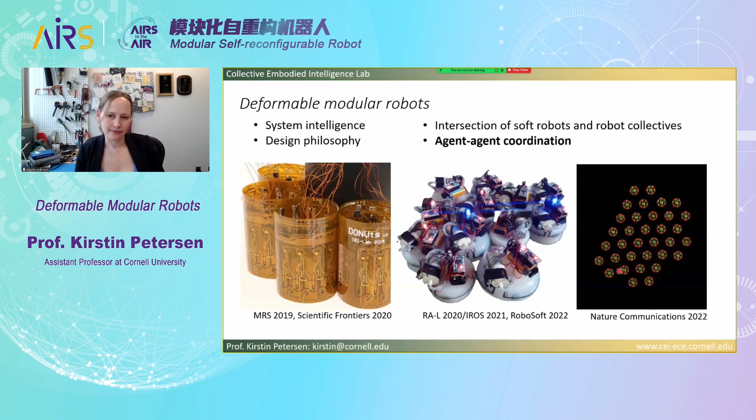So up till now, I think my talk has been a little bit abstract. So I'm going to now give you a look at 3 types of deformable modular robots that we published on, and the different types of coordination mechanisms that these support. So in this first example, it's going to be operating in the upper left half of my circle here. So I'm going to show you some agents with relatively simple actuation and sensing, but with ample room for intelligence and the ability to communicate and plan together.

So these are the donuts. They're made almost entirely out of flexible PCB. They have 2 8-bit processors that communicate heavily on board. They have IR sensors that are normally located up here on the perimeter, and they have an onboard battery normally. They also have these 12 switchable magnets down here.

And then to move, they can't move on their own because they don't have any actual actuators. But when they couple with others, they can synchronize their actuation of those magnets and then move together. And they can also use the same switchable magnets to do inductive coupling and then communicate with their neighbors at fairly high speed. So you'll see here that it's a flexible PCB, right? So we end up, even though it's very simple, with an easy robot that can morph. And we have demonstrated 3 types of motions that they can produce with each other. So you see one here.

This one is actually just sort of like jumping from one connection on a module to another. But there are two additional ones here. One is like a gear rolling about the neighboring perimeter. That's the one we've used the most. And the other one is sort of it rolls and translates while moving. So there's lots of different ways in which these modules can move by synchronizing what magnets switch to what

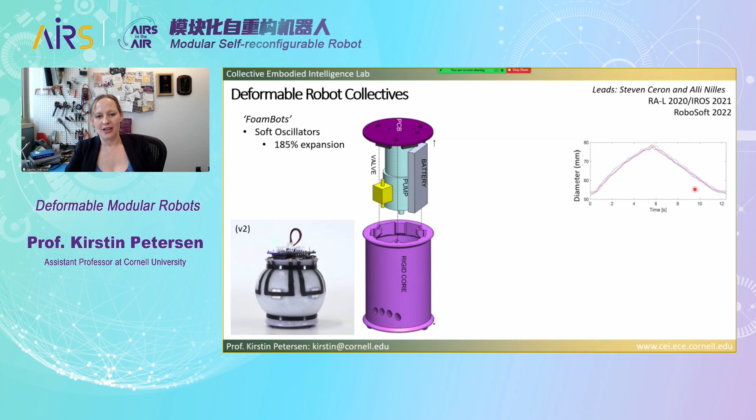So in this case, the robots are called the FoamBots. They're basically just little soft robotic oscillators. So each robot has a pump and a valve on board that allow the membrane around it to expand and contract. And these expansions are quite significant. So the newest version can expand by up to 185% of its diameter. And in the process of expansion, they almost change their overall stiffness by a factor of 2.

So quite significant. The modules also have these resistive strain sensors, these black lines in their membrane, so they can reason about strain. And they have 6 passive magnets on the side that help them couple into loose aggregates. They also have neighbor-to-neighbor IR communication, although we haven't actually bothered using that yet because we're more interested in these kind of strain-based coordination mechanisms.

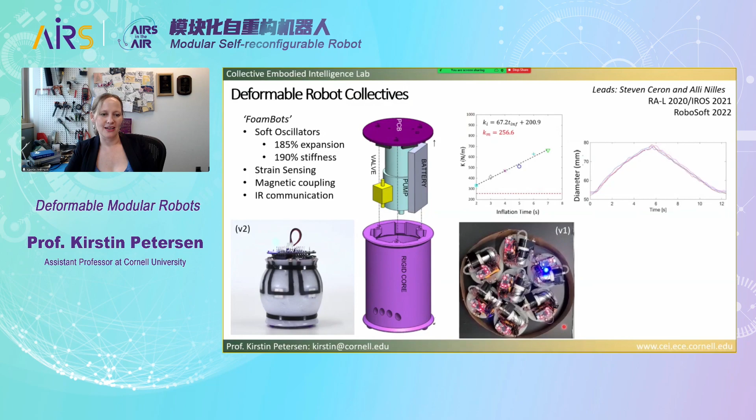So beyond all the benefits that I've already mentioned with respect to soft robots, these robots can also be used for things that rigid modules wouldn't be able to do. We already talked about how they can change their stiffness, but they're also, for example, gap filling. So if I put them into a space and I inflate them, then because they're just polymer, eventually they'll fill up all gaps. And you can imagine there can be applications for that at the microscale, for instance, if I'm trying to block a vessel or something like that.

And then, not surprisingly, but it's nice to see that we can also use synchronized movements to have them produce global motion through these traveling phase waves, similar in style to that slime mold that we saw earlier. So again, as with all our robots, we've developed complementary simulators. We have 2 models that capture the quasi-static behavior of these robots. One focuses on the interplay between the friction and the magnetic and the kinematic forces. And the other one focuses on how strain propagates within the collective.

And so rather than really focusing on traditional high-speed coordination algorithms, we're really curious to take these robots down the path of physical strain-based coordination, similar to what we see in slime molds. Because if we look at strain, that's something that comes for free with soft robots. It's what they actuate and it's what they sense anyway. So if we can also use it for coordination, that's a free mechanism we might as well be able to exploit. But no one's really looked at how you can exploit strain for these kinds of things.

So up till now, we've shown that strain sensing can be used to produce coupled oscillations. That means we can get the collective to either synchronize to do coupled force exertion, or we can have them synchronized with a phase delay like we see in this video to have them move. And then we've shown that we can deploy consensus algorithms, shown in this video, where the robots, even though they only sense strain on their own perimeter, are so tightly physically coupled in this large collective that they can still reach consensus and achieve, in this case, similar expansion levels if we try to bend it with external force first.

So we've demonstrated 6 modes of operation here, including rotation, oscillation, static collectives, where each particle is spinning around its own axis, static and oscillating chains, and self-propelling particle pairs in these gas-like modes. And I'm showing you some examples here next, where the collective is navigating through an intricate environment. Down here, they're doing contact-based object transport. And down here, they're doing flow-based object transport. So pretty sophisticated behavior.

Excuse me, Professor Petersen. There's a pop-up window on your screen for the Microsoft Office. I see it. Sorry. Okay. Is that better? Thank you for letting me know.

Okay, go ahead. Okay. But so basically you see a wealth of different behaviors with very, very simple modules like this, right? The modules, again, there's 0 explicit intelligence. It's all just in the morphology of the robot, but we can still get them to do quite sophisticated behaviors. Okay. So, an example that really lives on the right half side, partially because it has to, right? The robots are so simple now that there's actually no room for real hefty computation on board. Of course, we do have some centralized signal that helps them produce overall coordination.

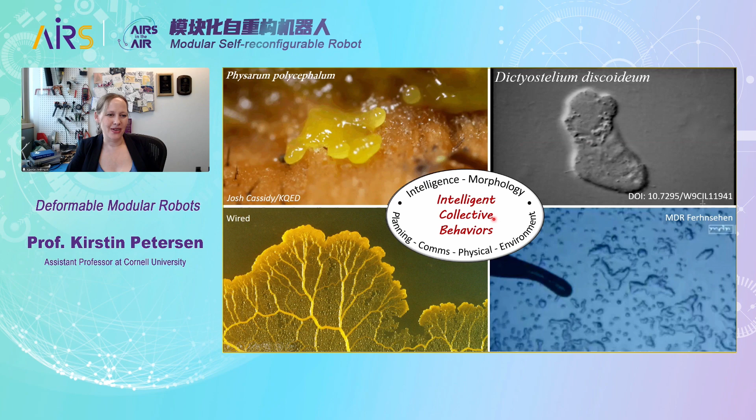So that was my trip around this circle of different ways in which we can inject intelligence into robot collectives and especially modular robots. And as I said, soft robots is such a new area, and modular robots is fairly established by now. There's so much room to explore, and I highly encourage more people to enter this field. It's a little harder because soft robots haven't been developed all that far, but I think there's grand potential.